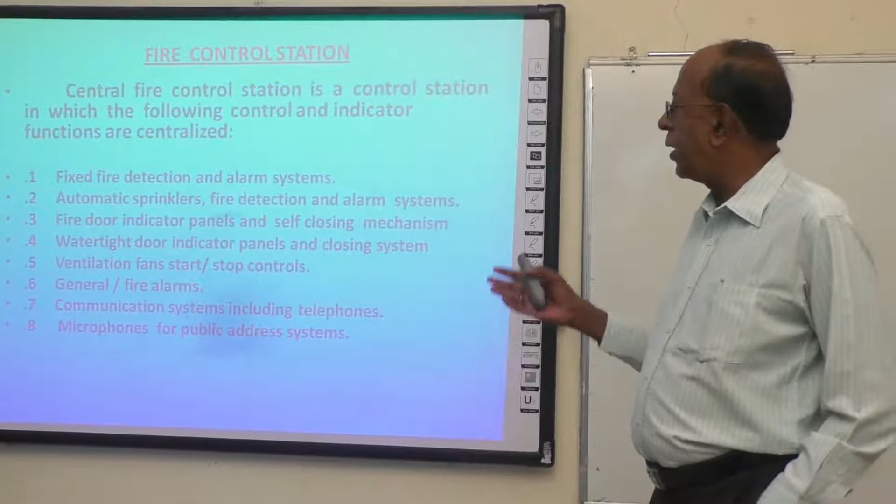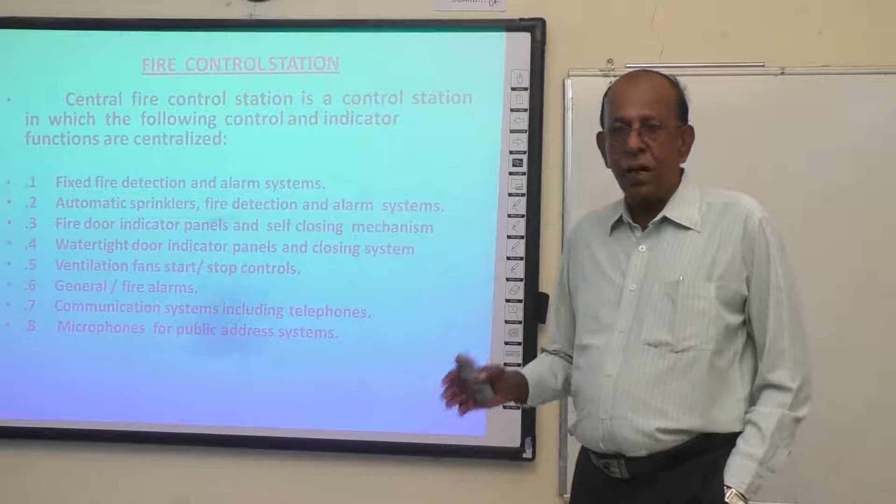Fixed fire detection means it has input sensors from various parts of the ship, connected to the particular alarm panel where fire detection is. When there is a fire in any part of the ship, the detection will be shown in the alarm system in the fire station. Normally it is called the emergency control station. It is part of the accommodation. It can be reached from the control room and easily from inside the accommodation.

So the fixed fire detection alarm system is a part of the main system. Next, automatic sprinklers and fire detection alarm system. Suppose you have a passenger ship, you have an automatic fire sprinkler system. In case of fire, sprinkler bulbs burst and pressurized water comes out to extinguish the fire, particularly in the accommodation. So automatic sprinkler system operation is also part of the emergency control station, the fire control station.

Third one is fire door indicator panels and self-closing mechanisms. Fire control indicator panels show which zone is under fire, where the fire originated, so you can locate it, go to that place and try to fight the fire with a portable extinguisher. If required, additional forces and additional firefighting appliances can be brought to the location. Certain places need a self-closing mechanism to stop the air.

That means skylights, doors or ventilation. The self-closing mechanisms are operated either pneumatically or hydraulically. Those are the self-closing mechanisms. The fourth one is the watertight door indicator panel and closing system.

Between one compartment and another, you have a watertight door. For example, for the engine room or steering gear room, you have a watertight door indicator panel which can be operated from the same fire control station or any other place outside the accommodation. So the watertight door is not necessarily part of the control station, but normally it is within the accommodation. A separate panel is there.

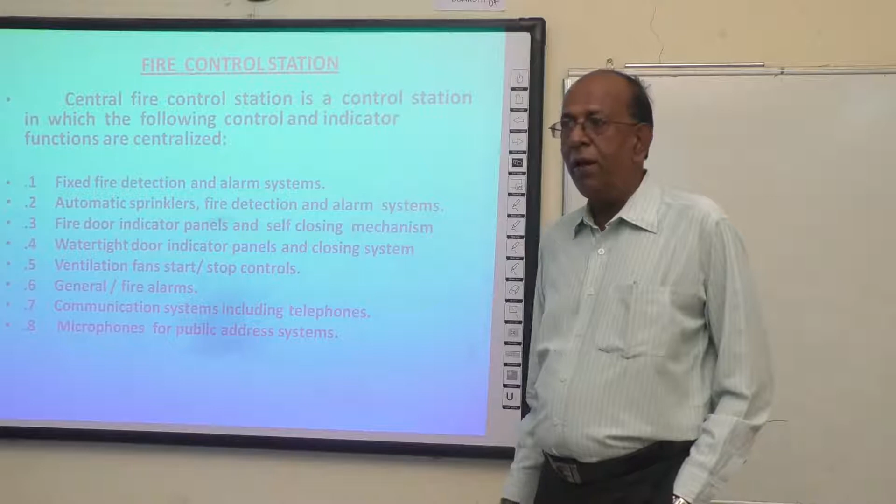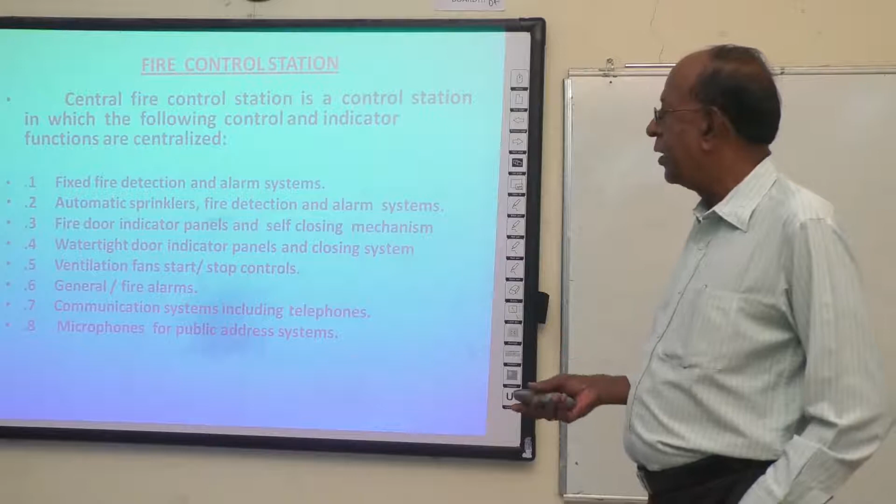Ventilation fan stop controls. Normally in any kind of fire, ventilation fans have to stop. Mostly if you have a CO2 flooding system, the moment you open the panel, all the ventilation fans will stop automatically. If required, you can always stop them manually and restart them. If you want to ventilate the area again after extinguishing the fire, you can start the ventilation fans manually from the same fire control station.

General fire alarms: in case of emergency, from any part of the ship you can have call alarms to intimate other people. If you notice a fire, the fire alarm can be activated from the accommodation, engine room or any part of the ship. The general fire alarm is meant only for fire. In case of fire, you will activate the alarm. You call them manual call buttons.

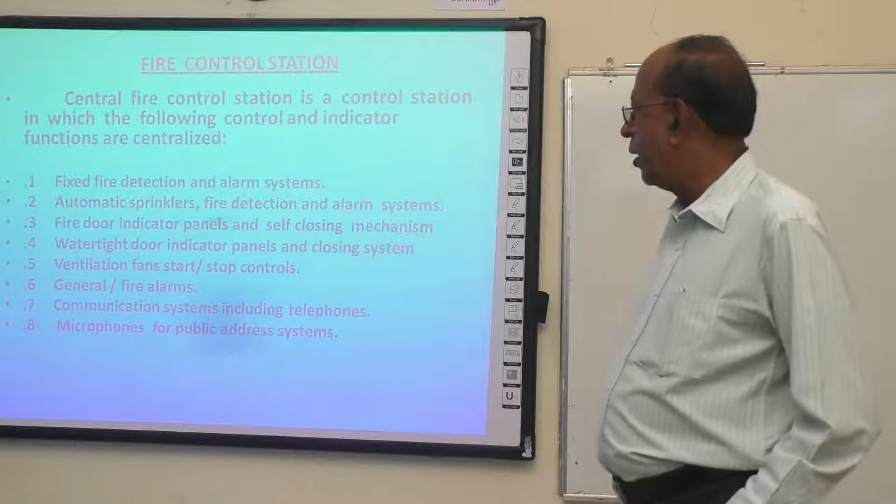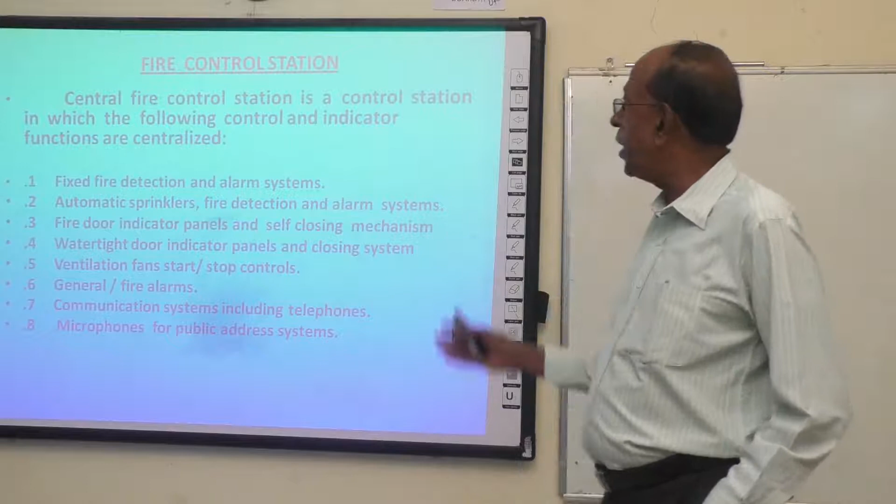Communications including telephones. Through the telephone you can communicate. If required, you can use a talkback system, walkie-talkie or VHF system to communicate within the ship as well as with shore. Microphones for the public address system: if you want to draw everybody's attention at the same time, you can use it. All these things are included in the fire control station.

Even in the dark, what we call blackout condition also. So from this point, they have wiring to the different zones and detector heads are there. We are going to see what kind of detector heads are placed in which section. Some sections need flame detectors, some sections need fire detectors or heat detectors, or sometimes you have a smoke detector. So depending on the zone, what type of heads you are going to use, we will discuss later.

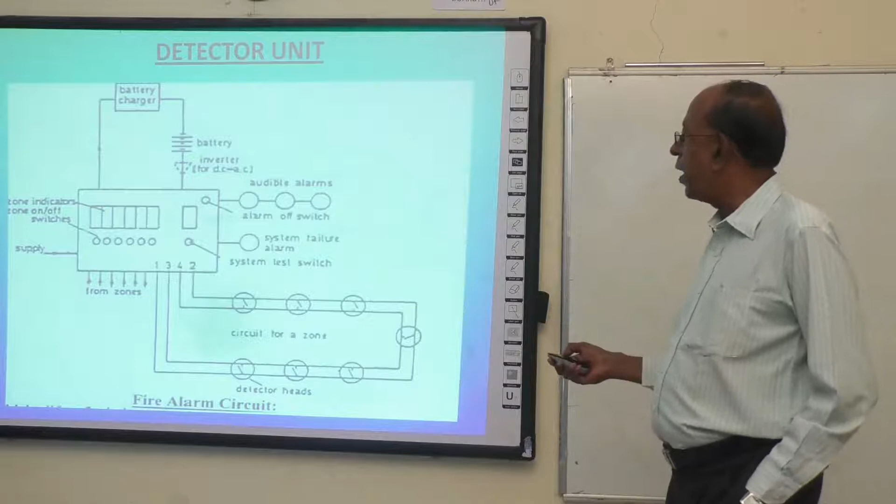In case this panel itself fails, has a breakdown due to the internal electrical circuit, it will give a failure alarm. It is a system failure alarm. So this alarm system is a system failure alarm. This is the zonal connection. Right.

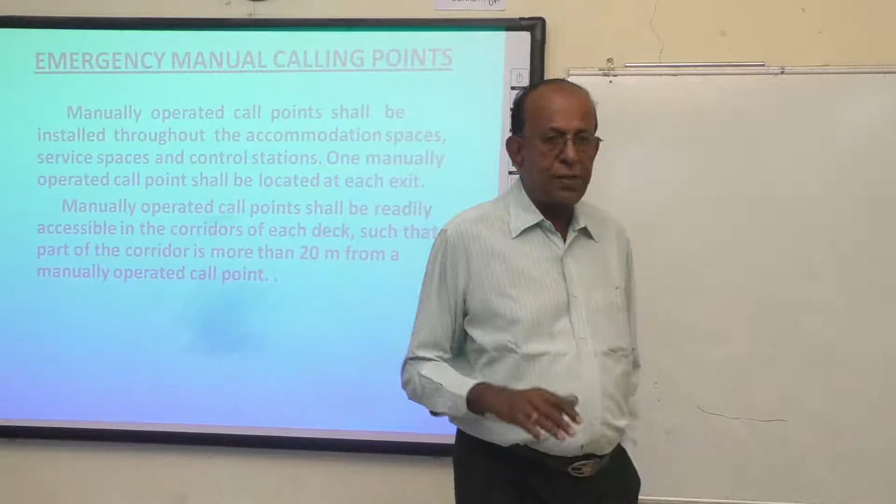So we'll go to this point, what is called manual call points. Throughout the ship, engine room, everywhere passengers are, except the cabins, when you come out of the gate, we have manual call points. The red buttons are available. Some modern ships have a glass fitted; you can remove the glass door or glass flap. Then you can manually operate these call points throughout the accommodation spaces, service spaces, control stations.

One manually operated call point should be located at each exit. Every place where there is an exit, just before that, we must have a manual call point. Manually operated call points are readily accessible in the corridors of each deck, so that no part of the corridor is more than 20 meters from a manually operated call point.

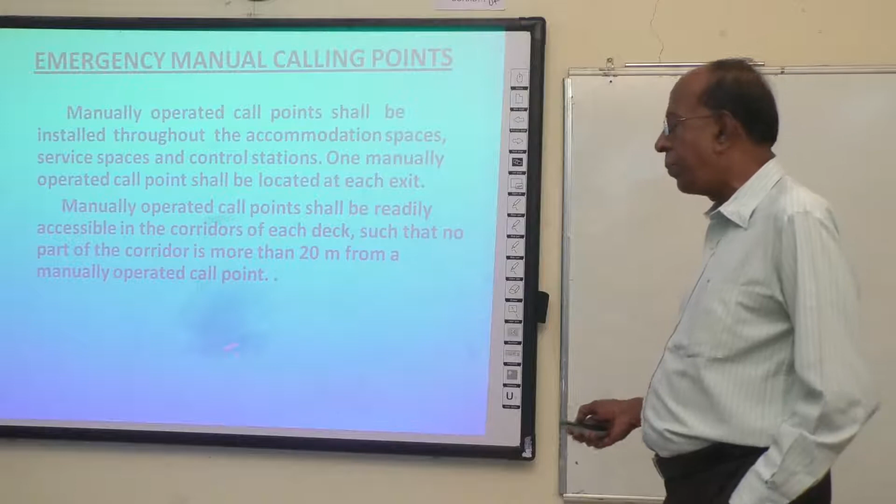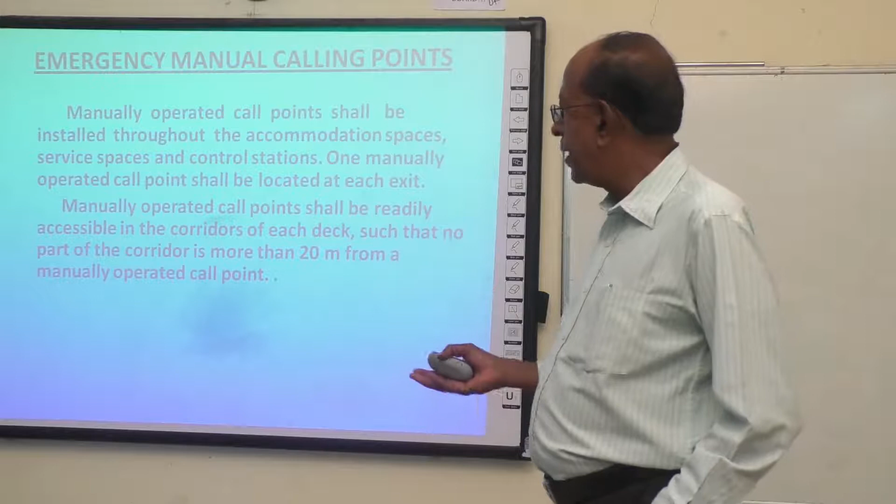This is an especially important point for public passenger vessels. The passengers who come out must be aware of the manual call point. If a passenger notices a fire, naturally they can use this call point. Not only the passengers, but crew or any staff working on the ship can use this manually operated call point.

Detector wiring. Now, wiring of this detector panel is very important because in case of fire, the wiring should not get damaged by the intensity of fire. Electrical wiring forming part of the system should be arranged to avoid galleys, machinery spaces of category A, and other enclosed spaces of high fire risk, except where it is necessary to provide for fire detection or fire alarm in such spaces or to connect to the appropriate power supply.

Now, you know that power is provided from the main power supply, 230 volts or whatever the ship's power supply is. In case the main power supply fails, the emergency generator is always there. It comes on automatically and power is available immediately. Even if in that case power is not available, the inverter battery supply is always there.

So this wiring should avoid the hot spaces. That's what I say: you should avoid machinery spaces of category A. Category A means class A machinery spaces. So avoid the galley, where you are supposed to have flame or a hot furnace or those kinds of things.

Machine spaces, hot chambers near any place which is hot, like a boiler or incinerator, those kinds of areas adjacent to any kind of hot area which can affect the electrical wiring. That's more important. So that's why they are talking about the wiring, not the control panel alone, which is in the accommodation. The sensor is located somewhere, and from the sensor, wiring goes to the control panel.

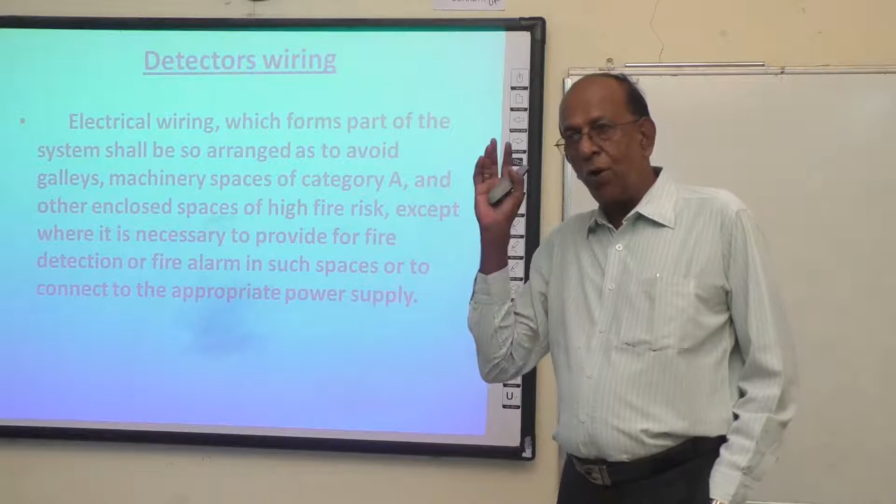From the remote part of the ship, wiring has to pass through so many places, and they have to avoid the galley and machine spaces. That means normally well-insulated conduit pipes are provided for carrying this wiring from the sensors to the control panel.

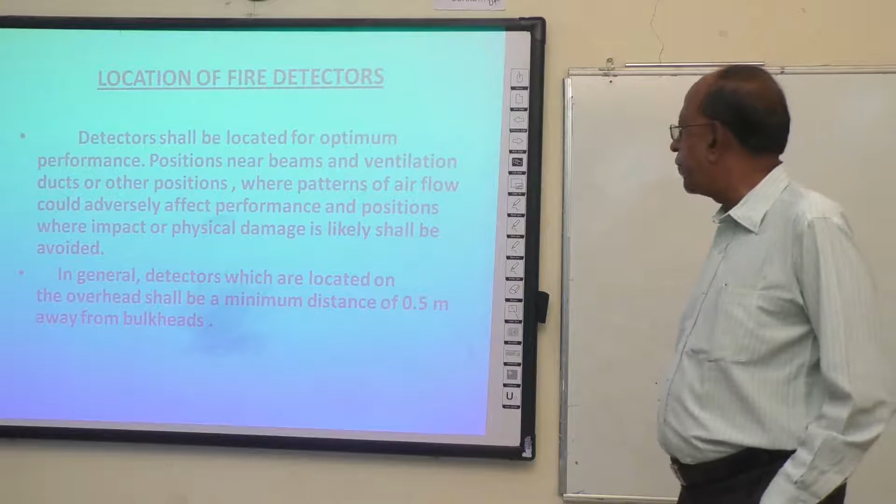Location of fire detectors. Detectors are positioned for optimal performance. Positions near beams and ventilation are other positioning considerations that can affect operational performance. Now we have a fire sensor or a smoke sensor. It is going to sense the heat or flame. There should not be an obstruction.

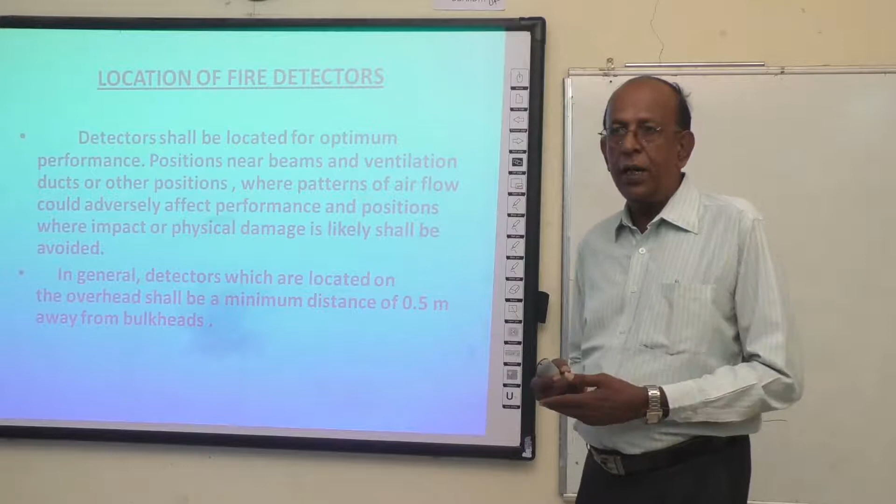If we have a beam or some kind of ventilation fan and the fan is blowing the smoke away, the sensor is not going to work and show the indication of fire. So that kind of ventilation, ducting or positioning will hurt the performance. It should not affect the performance of these smoke sensors or fire sensors.

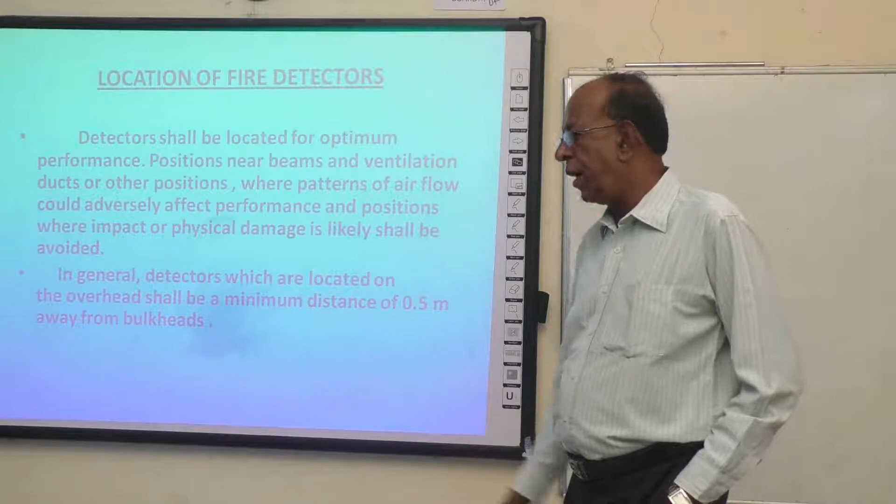In general, detectors are located overhead at a minimum distance of 0.5 meters away from the bulkheads. From the bulkhead, it should be 0.5 meters away; they should not be close to the bulkheads. So this is the maximum spacing of detectors. These are the typical spacings given for the maximum floor area for heat detectors and smoke detectors.

There are two types shown. 37 square meters floor area. How much distance apart do they have to be? 9 meters apart for heat detectors; for smoke, 11 meters. Maximum distance away from the bulkhead is 4.5 meters. These are classification-specific rules.

And the classes will be implemented with the administration, the various flag state administrations. They implement this, and even the shipbuilders make sure that this rule is followed. The administration may require or permit other spacing based on test data which demonstrates the characteristics of the detectors.

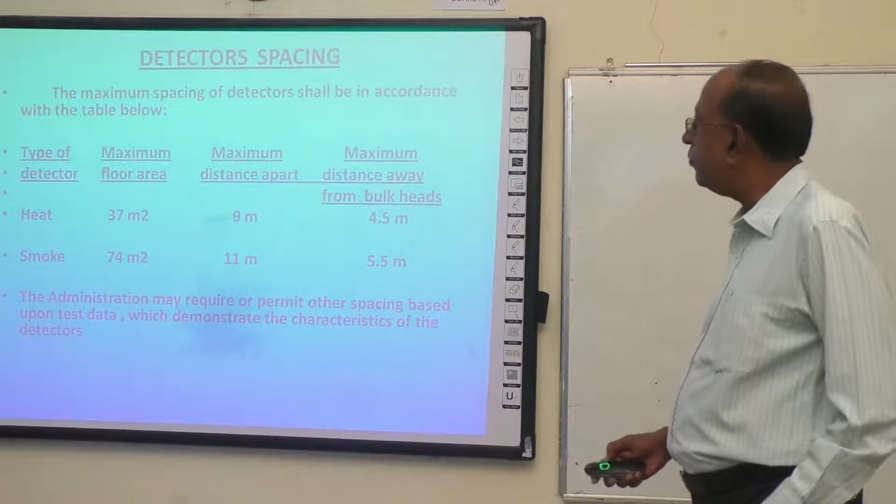There are three types of fire detectors. Three major types, though of course there are plenty of types. One is the heat detector, which senses the heat. The second one is a flame detector, which observes the flame right in front of it. Another one is the smoke detector. Maybe the flame or heat is a little far away, but the smoke emanating from the place is detected by the smoke detector. These are the three major types we are going to discuss one by one.

Fire detectors. Generally, they call them three types. The general name is fire detectors, but these are the three types. Fire detectors sense the heat, smoke, flame or some other indication of fire and initiate the alarm. So any one of the types will sense it, and after that, it initiates the alarm.

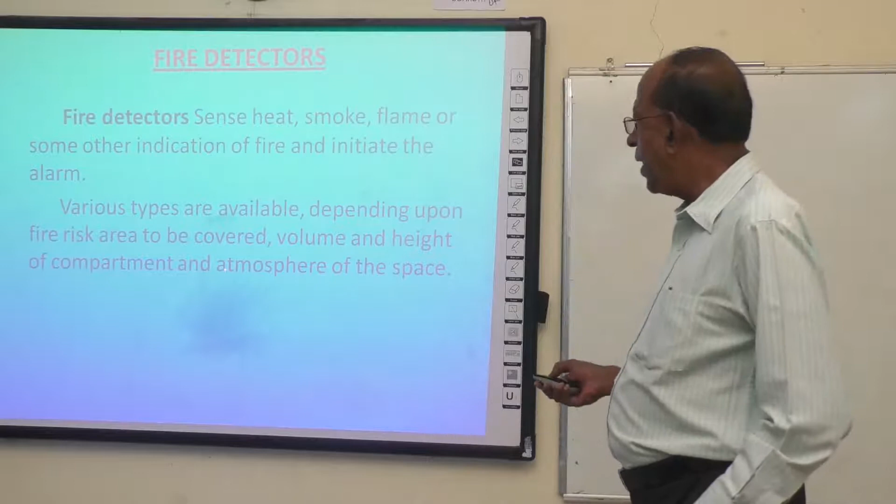Various types are available depending upon the area to be covered, volume and height of the compartment and atmospheric conditions. Maybe the compartment always has a high humid atmosphere, or some kind of temperature, or the area is going to have smoke. So it depends on the area to be covered, volume of the compartment, height of the compartment and atmospheric condition.

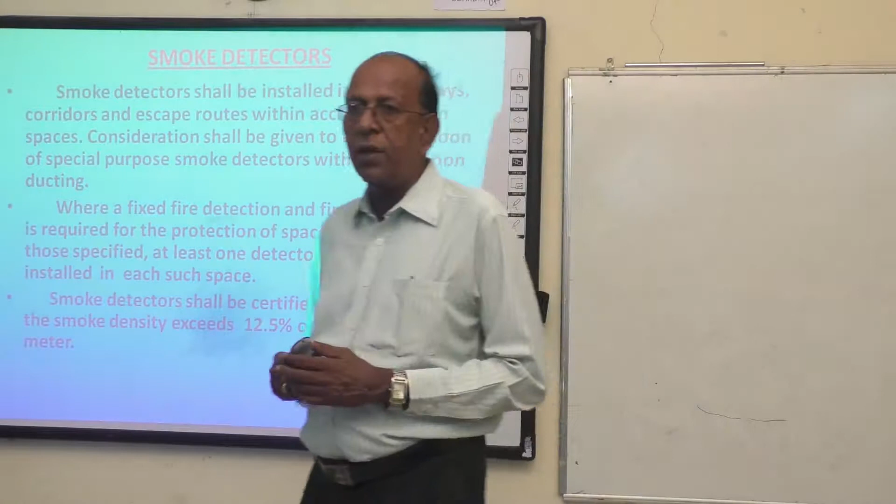Now we will come to the first one, smoke detectors. Smoke detectors shall be installed in all stairways, corridors and escape routes within the accommodation spaces. Smoke detectors are mainly used in the accommodation spaces where the passengers or crew are. Consideration shall be given to the installation of special smoke detectors within the ventilation ducting.

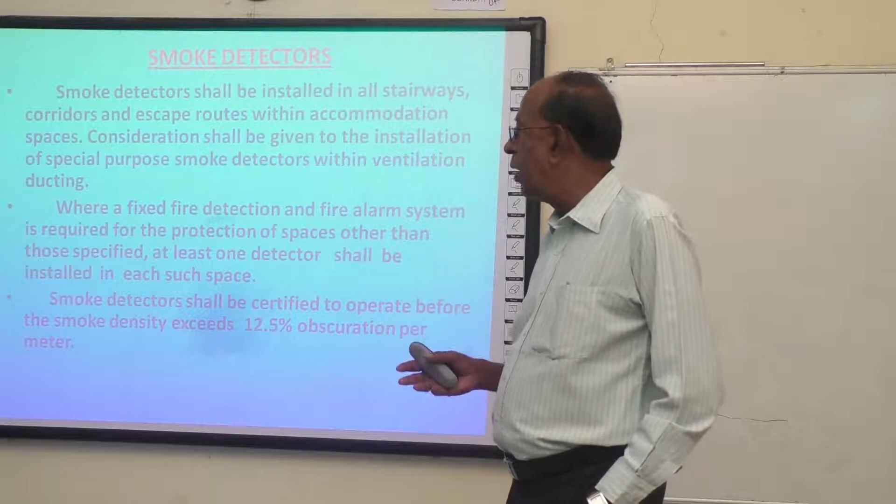In the ducting the air flow is always there, whether it is refrigerated air, cool air or hot air, going for air conditioning or a refrigeration compartment. So in this area special types of smoke detectors are needed for identifying the smoke. Where fixed fire detection and fire alarms are required for spaces other than those specified, at least one detector shall be installed in such a space. So minimum one detector.

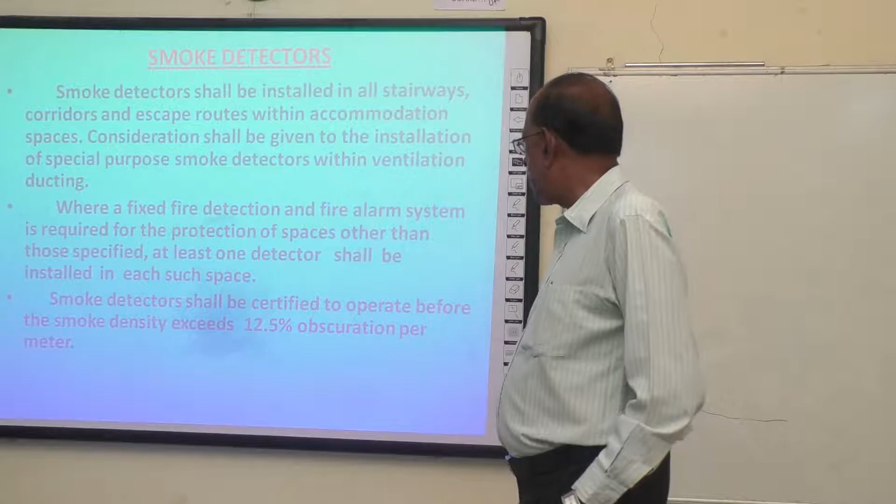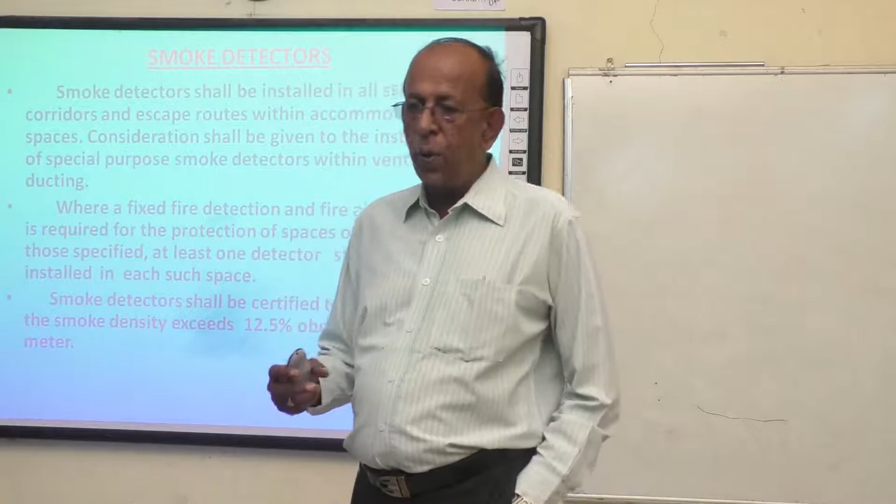Smoke detectors should be installed in this space. Smoke detectors shall be certified to operate before the smoke density exceeds 12.5% obscuration per meter. Obscuration means observing, so it is going to identify. That is called, technically, obscuration. And 12.5% obscuration. Now, what do you say?

What is the oxygen percentage? 21%. Okay, and when it comes down below 8%, it is called an inert condition. Less oxygen. Like that, the smoke density increases by 12%. That means up to 12.5%, nothing will happen. When the smoke density increases to 12.5% obscuration per meter within the distance, the smoke sensors are operational.

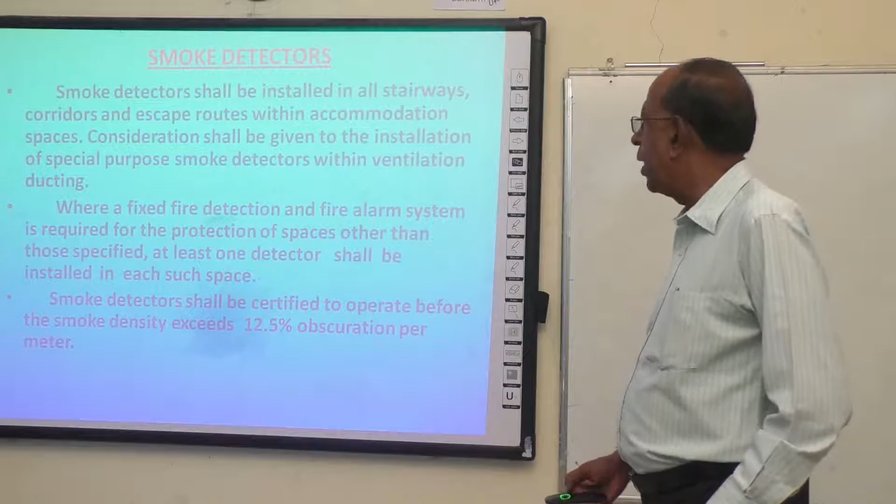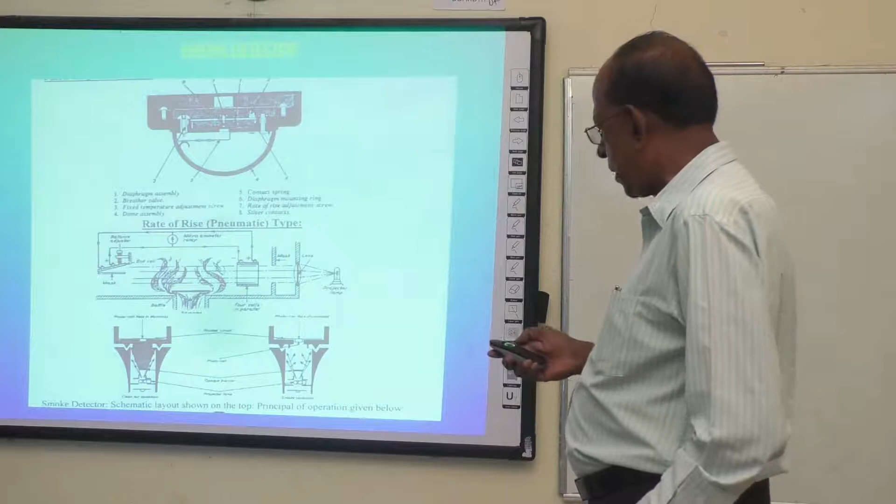This is one type of smoke detector, the pneumatic type, where you have a flame, the smoke is going through that, you have a projector lamp, and you have a lens across here. So, rate of rise type smoke detector. Okay, this is a smoke detector of some knob type thing. It can be replaced. All this assembly can be replaced in case you have a fault.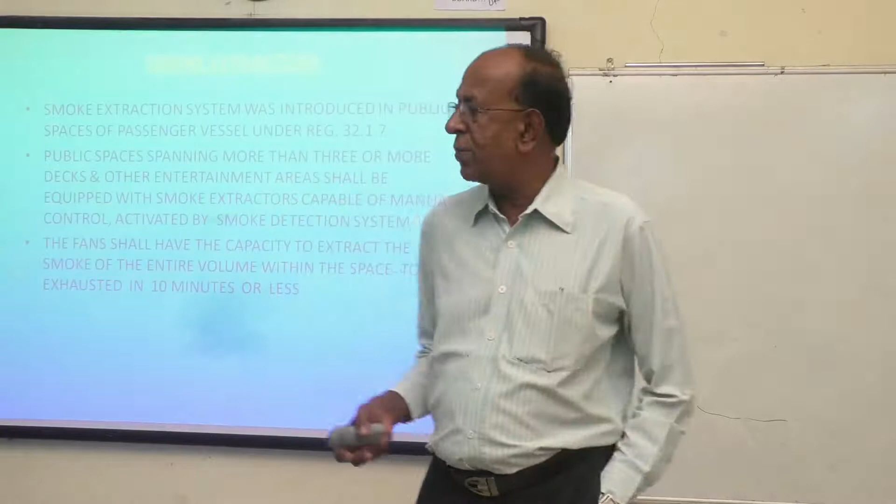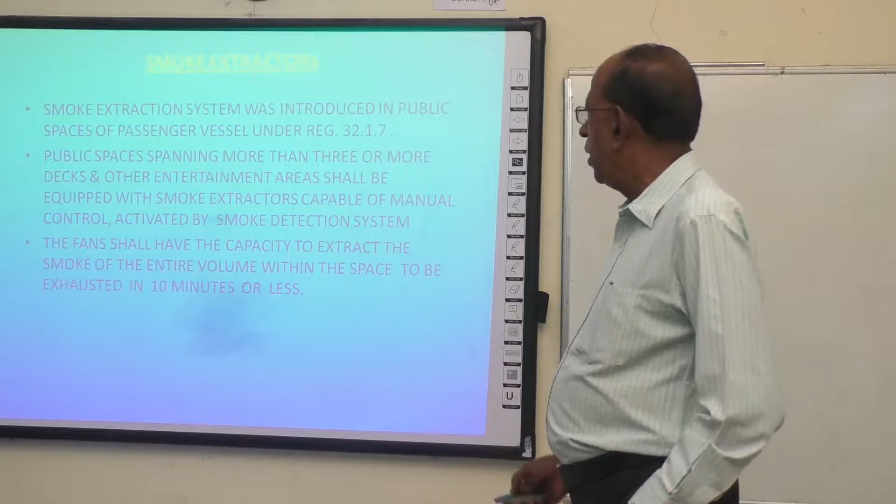Smoke extraction system was initiated in public spaces as well. Now, smoke extraction system. That means public spaces, for example in the passenger accommodation, we have a big hall or dining hall or dancing floor or bar or restaurant or something. In those places there is smoke extraction, because the smoke is being continuously extracted to identify whether the smoke density is increasing or not. So the smoke detector system is capable of manual control.

These fans have the capacity to extract the smoke of the entire volume of the space within 10 minutes or less. The complete volume of air can be extracted. The entire space can be extracted within 10 minutes. This is what smoke extractors are.

Heat detectors: heat sensors and detectors may be fixed temperature or rate of rise. There are two types of heat detectors, called fixed temperature or rate of rise. That means when the temperature reaches 78 degrees or 75 degrees, the alarm comes. Or sometimes for the rate of rise type, there are several types. In some areas, if the temperature is rising from 40 degrees centigrade to 45 degrees centigrade very fast, then the alarm will come.

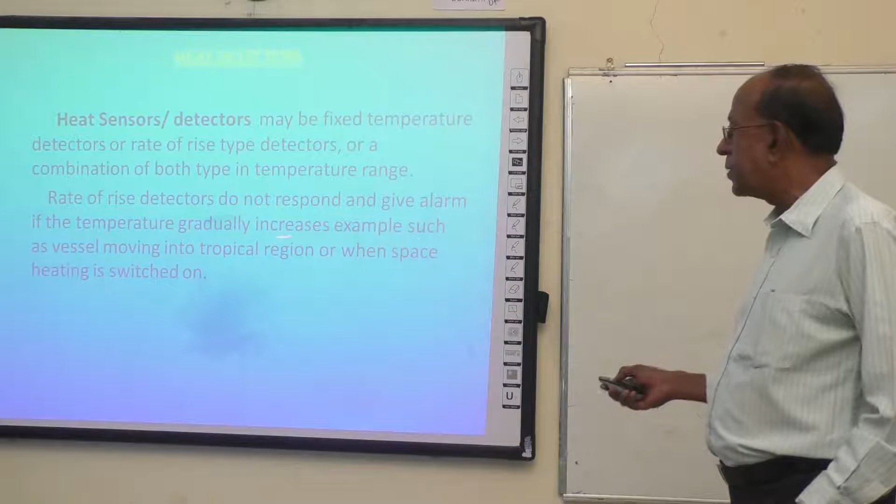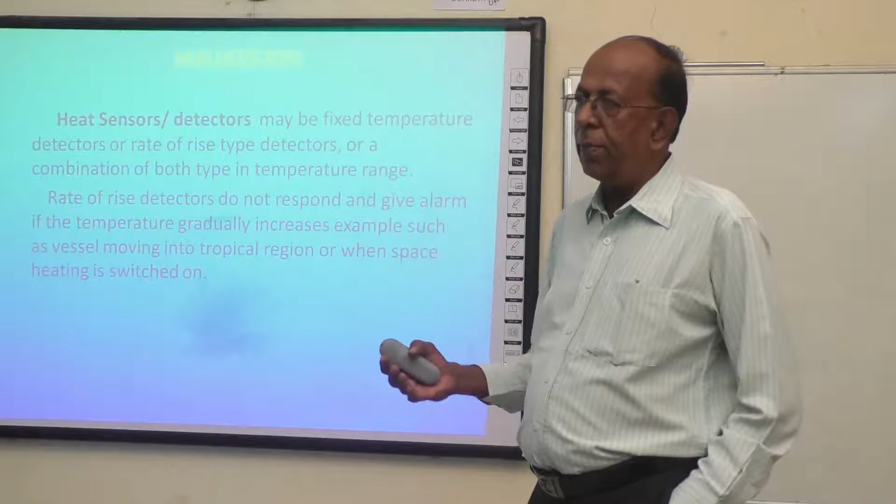But if it is gradually rising 41, 42 over a period of half an hour, that will not work. So there are two types. Rate of rise detectors do not respond to give an alarm when the temperature gradually increases. For example, in this area we are in a tropical region and you are using the room heater. You are increasing the heat slowly from 15 degrees centigrade to 25 degrees. Okay, you want the comfort of the accommodation, but the moment it crosses, the rate of rise is too much.

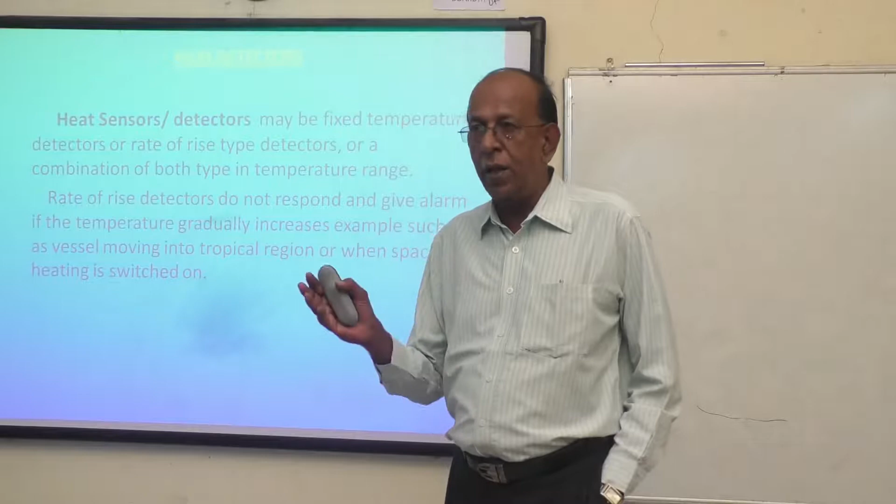When the rate of rise is very fast due to the heat from electrical heaters or steam heaters, then this rate of rise alarm can happen. Otherwise, normally used heat sensors are fixed temperature. For example, you may have a laundry room. A laundry room is supposed to have a temperature of 70 to 75 degrees centigrade for drying the clothes. But the moment the drying room temperature goes to 80 or 85, that fixed temperature heat sensor is going to go. So it depends on the area where you are going to fit the heat sensors.

Heat detectors shall be certified to operate before the temperature exceeds 78 degrees centigrade, but not until the temperature exceeds 54 degrees centigrade, when the temperature reaches those limits at a rate less than 1 degree centigrade per minute. That means per minute it can increase up to 1 degree centigrade: 40, 41, this minute 42, then this minute 43. Up to that, okay. If it crosses that limit, then the alarm comes.

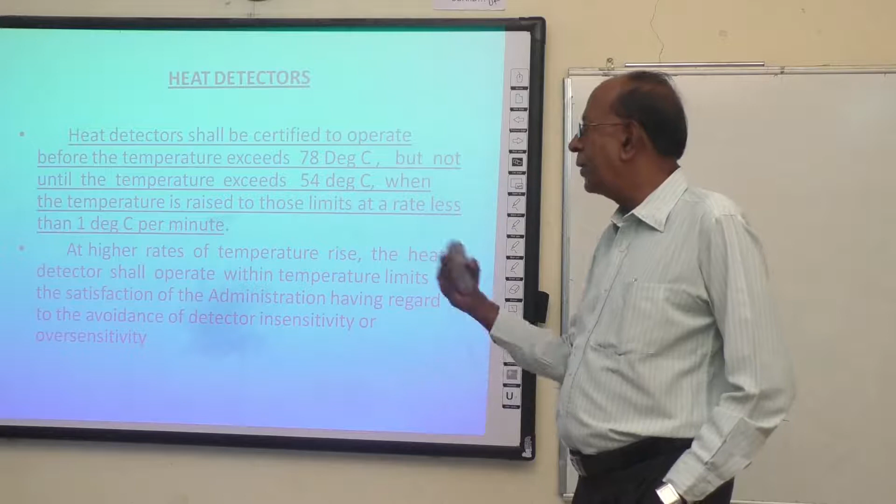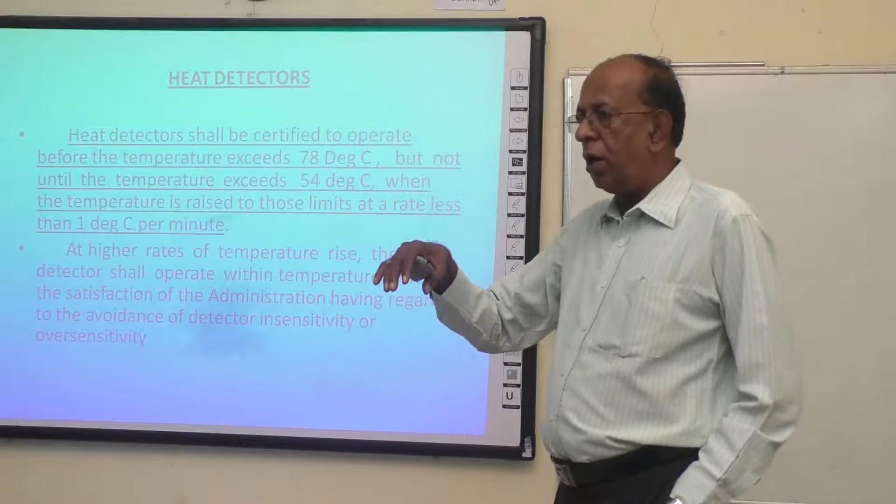At higher rates of temperature rise, the heat detector shall operate within temperature limits to the satisfaction of the Administration. Anyway, the rate of rise type also has a fixed temperature. When it reaches the maximum temperature, for example, 78 degrees, then the alarm is going to come. That's called a heat detector. It senses only the heat. When the temperature inside the hall or the particular compartment increases, the heat detector is going to work.

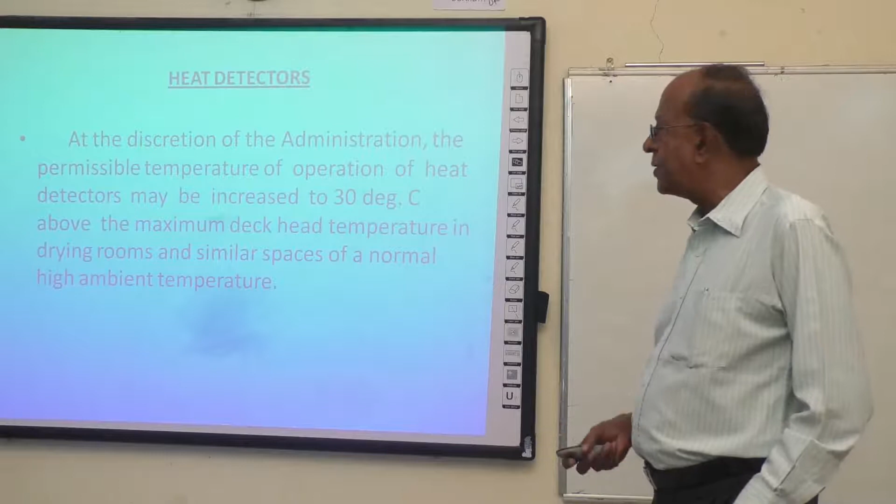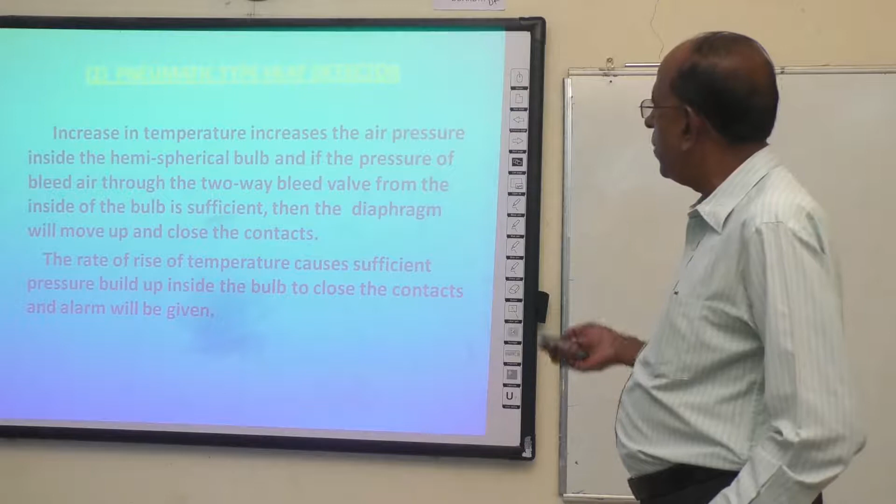So there are types of detectors going through that. Bimetal coil type detector, what is that? The second one is called the pneumatic type of heat detector. Now here, the bimetal type has two metallic strips, A and B. Due to the heat, this one will move faster because it is exposed to the heat, whereas this one will move slower. This is insulated.

That's why insulated means it will move slower. This is not insulated inside. We've got a bimetallic strip. Bimetallic means two metals; each metal's linear expansion is different, and thermal conductivity is different. So the lighter metal will expand faster and move the contact. The movement makes a contact and it gives a signal.

So this sensor, which is fitted in the engine room or some place where it is sensing the heat, closes the circuit and gives the alarm to the fire control station for the particular zone. Within the zone there are also different sectors, so you can identify which part easily. This is the bimetal type.

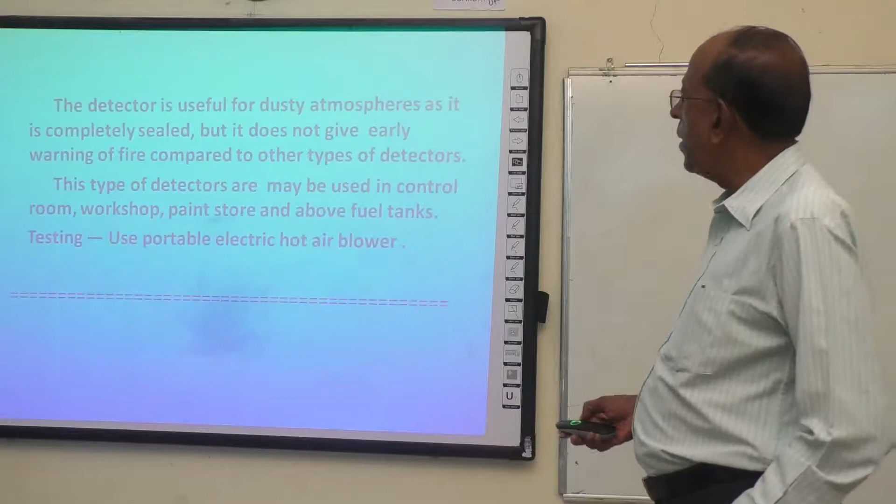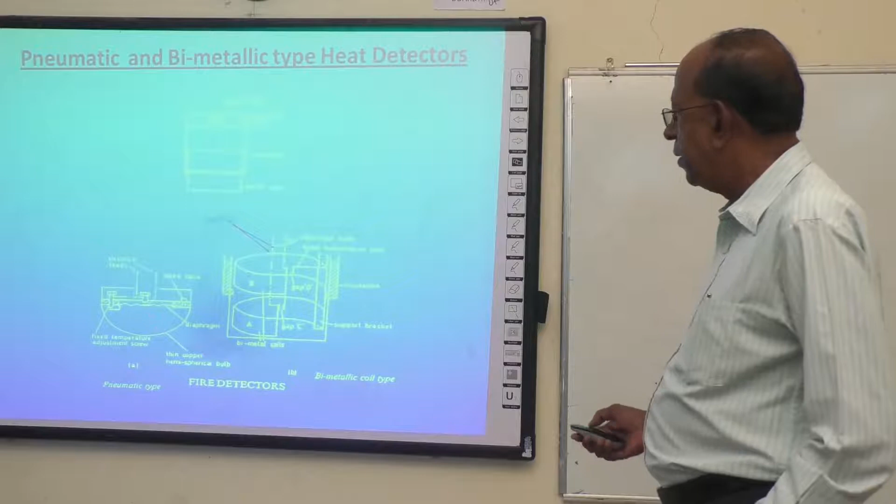Okay, the next one is the pneumatic type heat detector. This one has got a diaphragm inside. The heat comes, the air inside expands. They have a fixed temperature adjustment screw, which means you can adjust the temperature. In some places you want the alarm at a higher temperature, where you normally get false alarms. Then you can use that.

So this type has a bleed valve and a diaphragm. The diaphragm starts moving and it makes a contact. This is shown like this, but actually they have insulation around it, so you can't see from outside. What is inside is actually the air in these pipes.

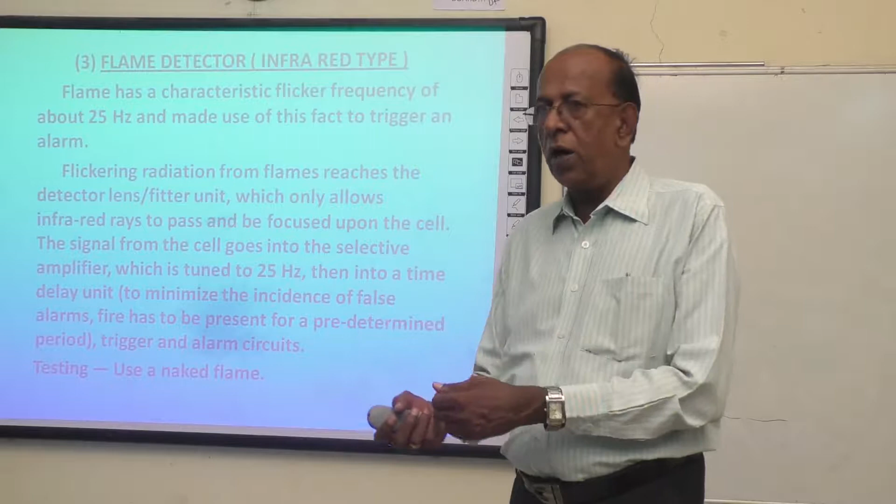Then the flame detector, infrared detector. Now you see the flame: someone is lighting a match, or some gas cutting. If this kind of sensor is fitted there and something like a burning torch or anything is lit, immediately the alarm will come, because it has a flicker frequency of 25 hertz.

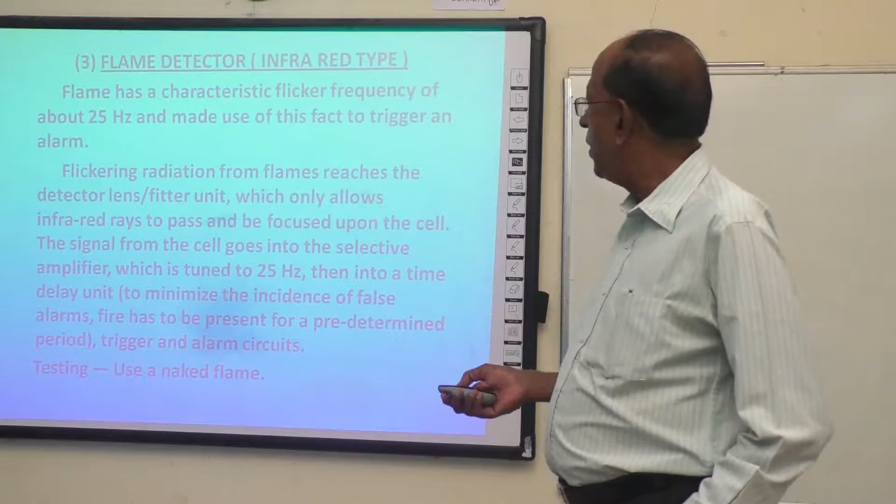25 hertz is a very low frequency. Radiation from the flame reaches the detector lens, which allows the infrared to pass and focuses it upon the cell. The signal from the cell goes to the amplifier tuned to 25 hertz. There is a time delay unit to minimize false alarms; the fire has to be present for some time. Okay, now what is it?

Now we have a neon lamp there. The flame is right in front of you, something is burning, and the flame reaches this area. The photoelectric cell is like what you use in a camera; it is like a camera lens. It catches the flame, then the amplifier, tuned to 25 hertz, and they have a time delay.

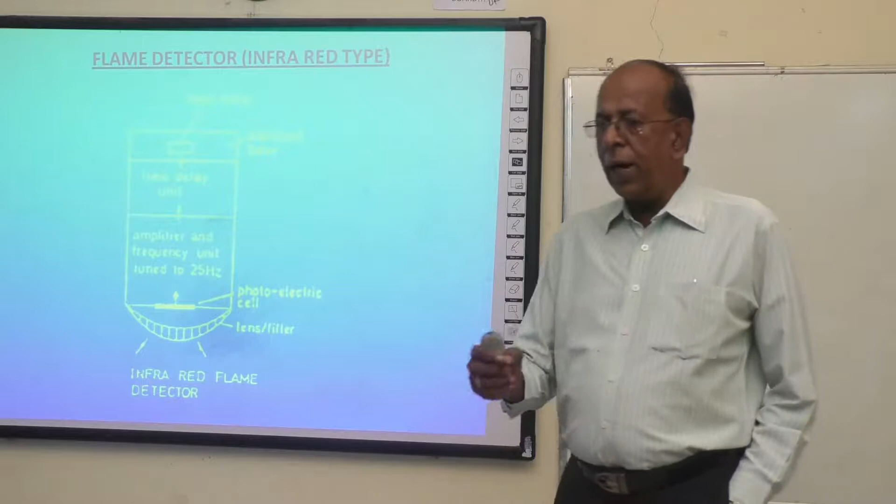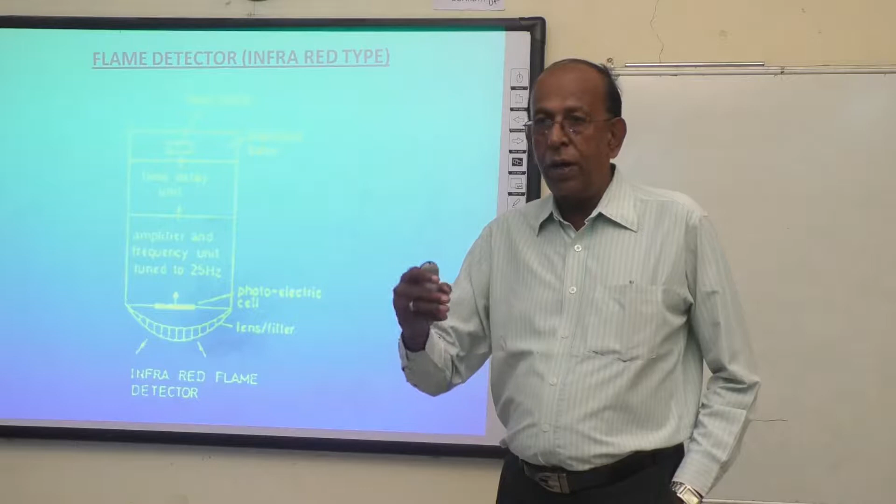Why is the time delay unit there? Momentarily there was a fire, like lighting something with a lighter, and then you put off the lighter. So it does not alarm immediately. That's the time delay unit. Otherwise, you have the neon lamp sensor. This is called the flame type, infrared type. It is used in most places on the ship and is one of the popular flame detectors. This one is a heat detector; this is the flame detector, infrared type.

Then the smoke detector, light scatter type. What is the light scatter type? We have some kind of passage with light passing through. Suppose smoke comes in front of it; the light will get scattered and disturbed. That's called light scattering. On that principle it uses a photocell. I'll show you the picture.

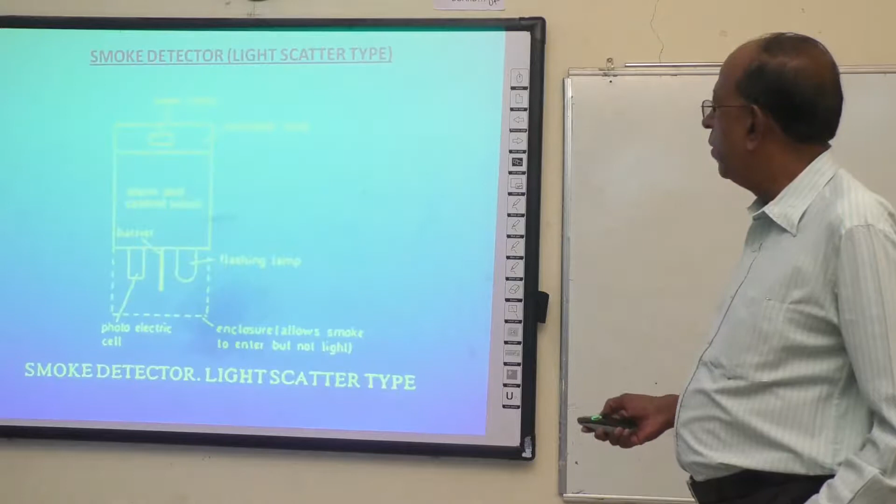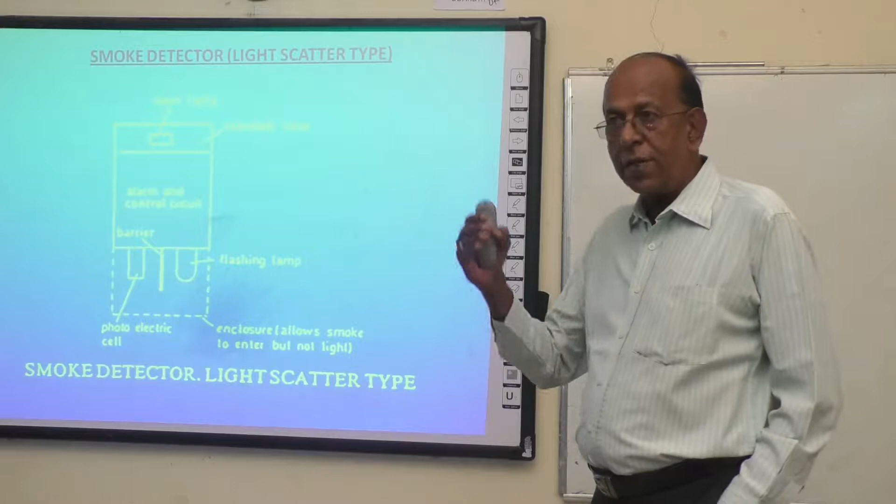Here we have a photoelectric cell. This is the enclosure, the flashing lamp is there, and the light coming through will get scattered. Because of the disturbance of the beaming light, the alarm comes. That's called the light scatter type. So these are the two types: one is the infrared type, the other is the light scatter type.

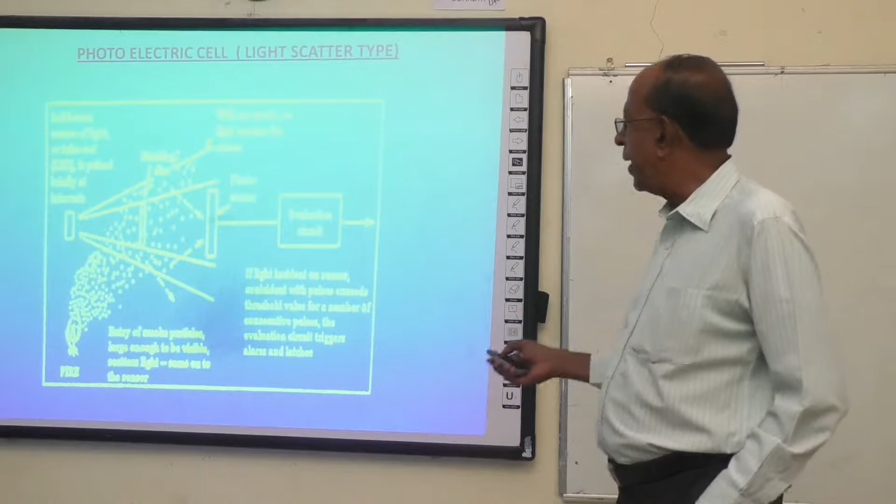This is the smoke detector, the principle of the photoelectric cell. This shows how the beam goes when smoke is coming through; the light gets disturbed. Smoke passing through means the light will not fall properly on the lens. This is an evaluation circuit with the sensor. The light falls on the sensor, and if it is obstructed by the smoke, the circuit gets activated with the smoke alarm.

That is the main principle of that light scattering type detector. In some element, the detector photocell of light scattering makes about 90 degrees to the parallel beam. So there are two types: one is the horizontal type, another one is this type.

Smoke comes in like this, with a parallel light source, and there are two light sources in the machine - a measuring cell and a parallel light cell. The measuring cell is here, smoke comes from here and gets disturbed. The rays, shown as arrows, get distracted by the smoke instead of going past, and this activates the photocell, which gives an alarm. It is connected to the circuit which gives an alarm.

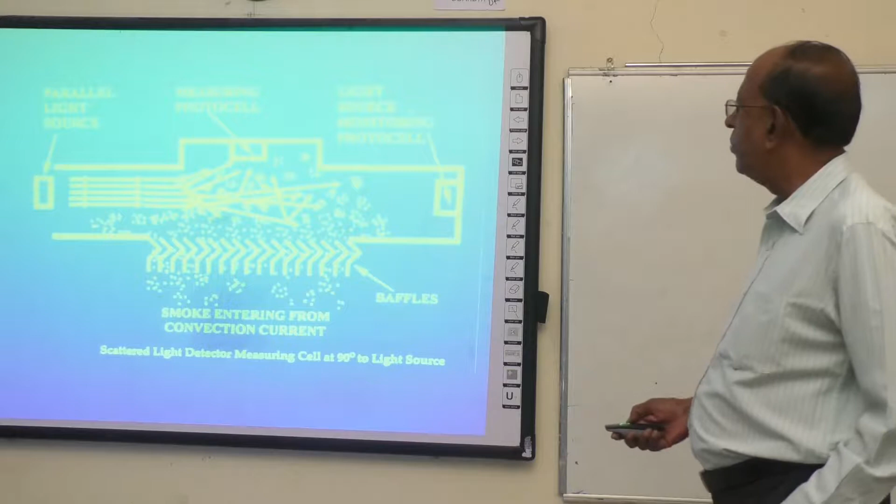Then you got smoke combustion products ion chamber smoke detectors. This is another thing - ionization chambers. There are two ionization chambers in series, where radioactive material provides a continuous supply of ionization.

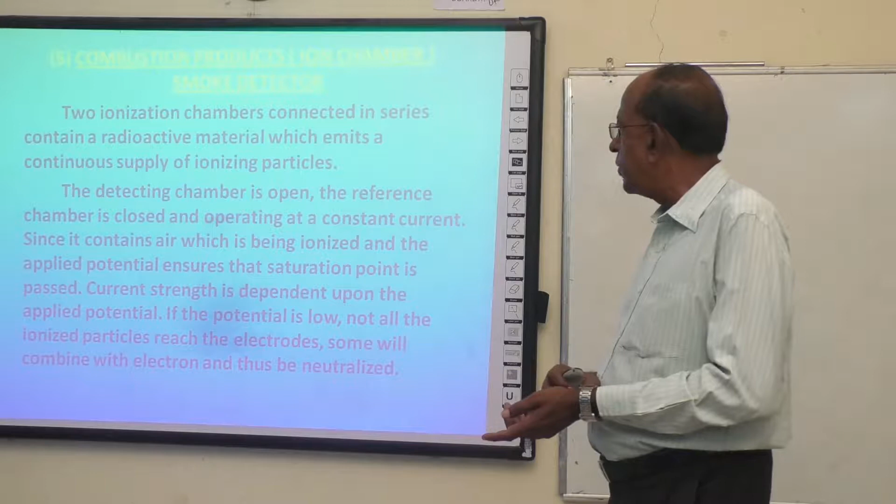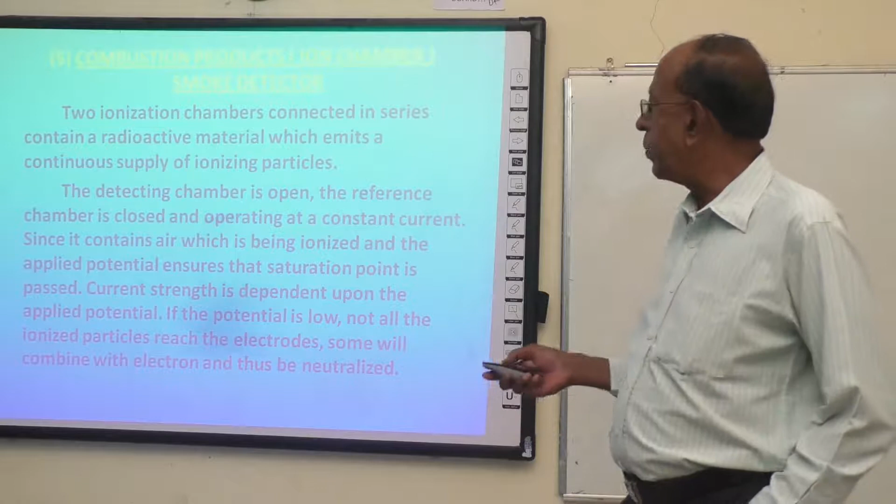So what is happening here? We have a radioactive chamber and a reference chamber. Any combustion gas detector, for example, is fitted where the diesel engine exhaust manifold is located, close to that.

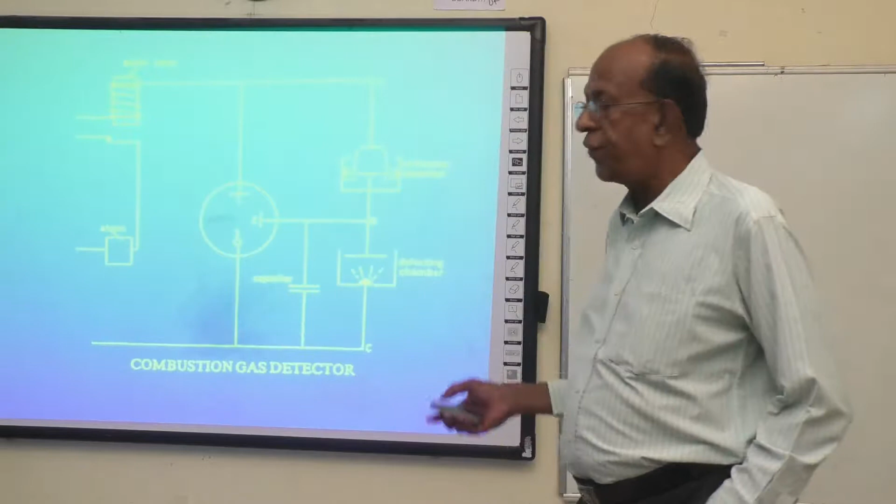In exhaust gas, there is combustion gas - it's thick black smoke. If it comes in contact with any oil or inflammable products, it will catch fire. That's the reason the combustion gas detector is fitted near the boiler, near the diesel engine, very close to it. Any exhaust gas leakage that comes out will be measured by this detecting chamber, which will activate the alarm, give an alarm relay, and trigger the alarm.

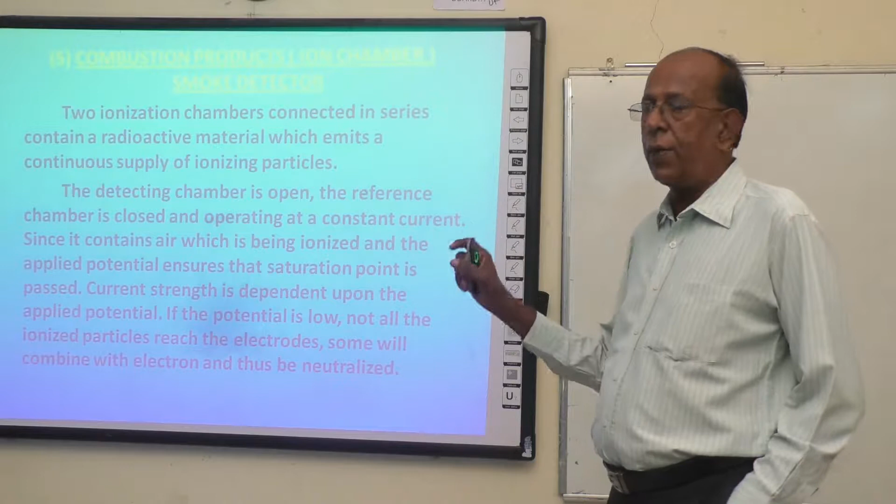So what is happening here? The detecting chamber is open, the reference chamber is closed, operating at a constant current. So the current supply is always there for the circuit. Since it contains air which is being ionized, generally air is around, air is only there.

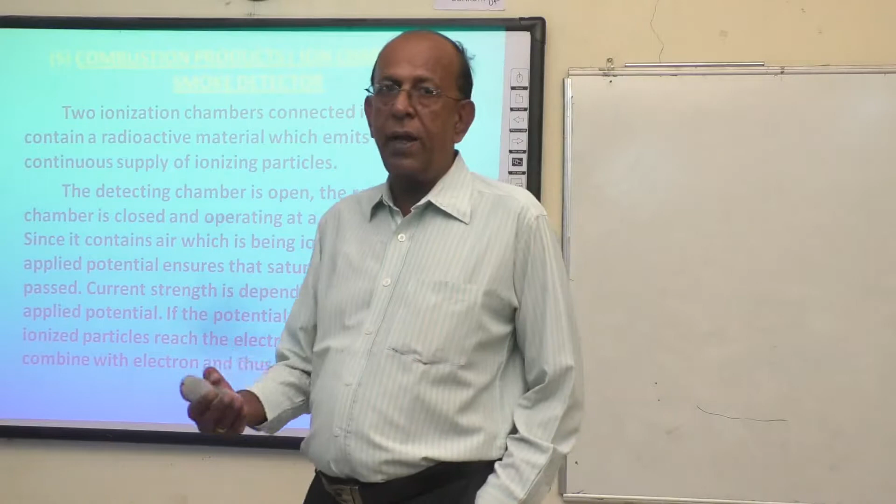The moment smoke comes in, the current strength depends on the applied potential. If the potential is low, not all ionized particles reach the electrodes - some will combine with the electron. So the moment you get disturbance of the air, the ions in the air get disturbed, then you will get an alarm.

With the potential disturbed beyond a certain value, all the ion components and electrons cause the current to remain approximately constant irrespective of further increase in potential. So the potential difference is measured between the terminals, and when ionization takes place, the potential difference remains constant as long as it's just air.

The moment there is saturation of smoke inside the ionization chamber, the reference chamber has a constant resistance. Combustion particles, visible or non-visible, pass through the open detecting chamber, and the current will drop. This combustion product is made of larger, heavier particles than normal gas.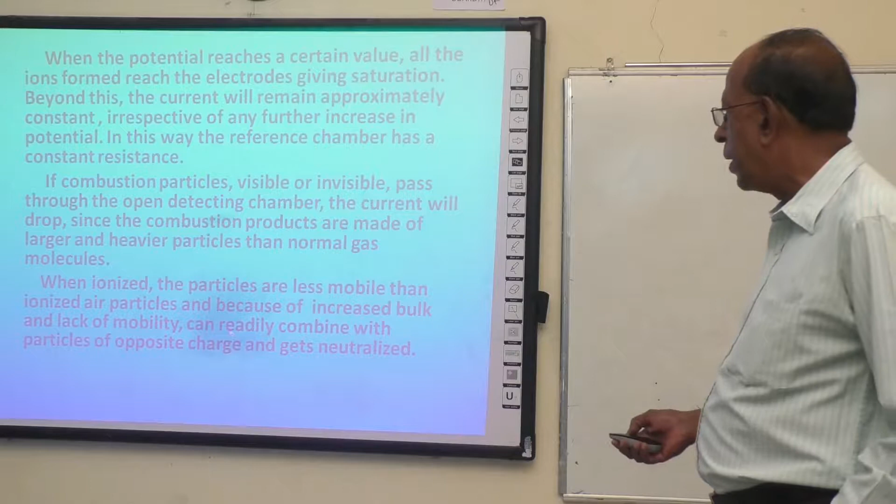Normally the gas molecules or combustion gases have carbon products or carbonaceous products, hydrocarbons, carbon dioxide, carbon monoxide - those kinds of heavier particles. When they come across this detecting chamber, the ionized particles are less mobile than normal ionized particles because of the increased bulk and lack of mobility - they readily combine with particles of opposite charge and get neutralized.

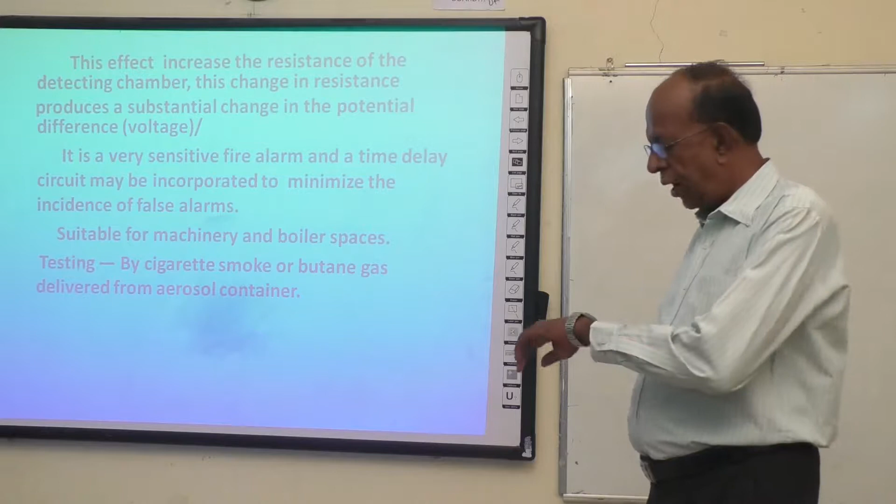This effect increases the resistance of the detecting chamber, and this change in resistance produces a substantial change in potential difference. So the potential difference being measured changes because of the change in atmosphere, the presence of combustion gases. It is a very sensitive fire alarm, with a time delay unit between incidents to avoid false alarms.

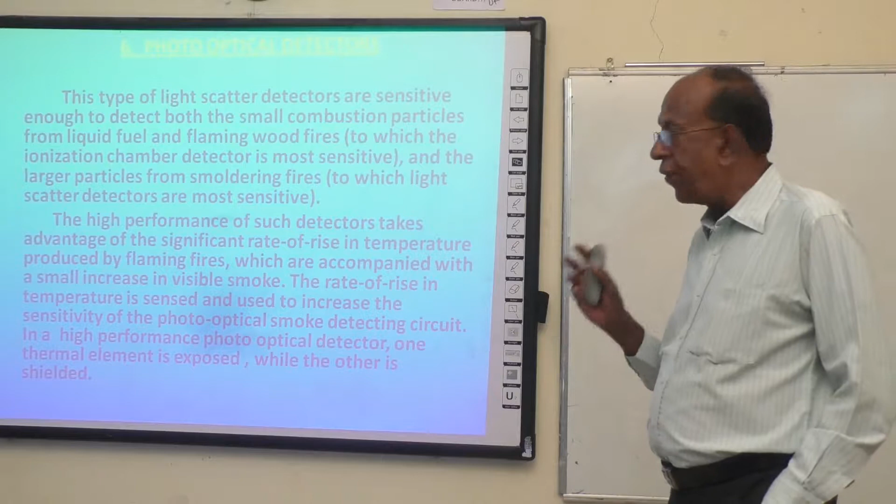Photo optical detectors, or light scatter detectors, are sensitive to both small combustion product, liquid fuel and flame gas, and to larger particles from smoldering fire. So these photo optical detectors can detect both types of fires: one is flame with smoke, the other is smoldering fire where there is no flame at all, just smoke continuously coming. So you can have both things.

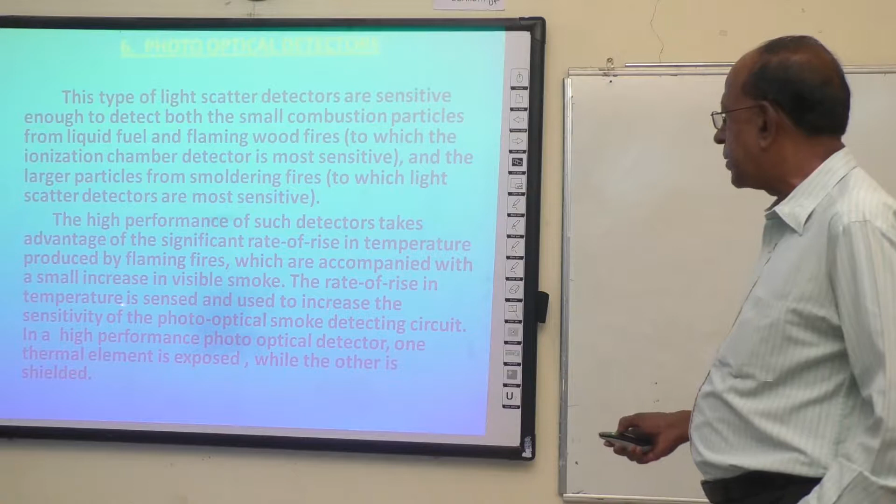Photo optical detectors are very sensitive. High performance detectors take advantage of significant rate of rise in temperature with flaming fires. When accompanied with a small increase in visible smoke, the rate of rise temperature sensitivity can increase the sensitivity of the photo optical smoke detector. High performance photo optical detectors have one thermal sensor and one shielded sensor.

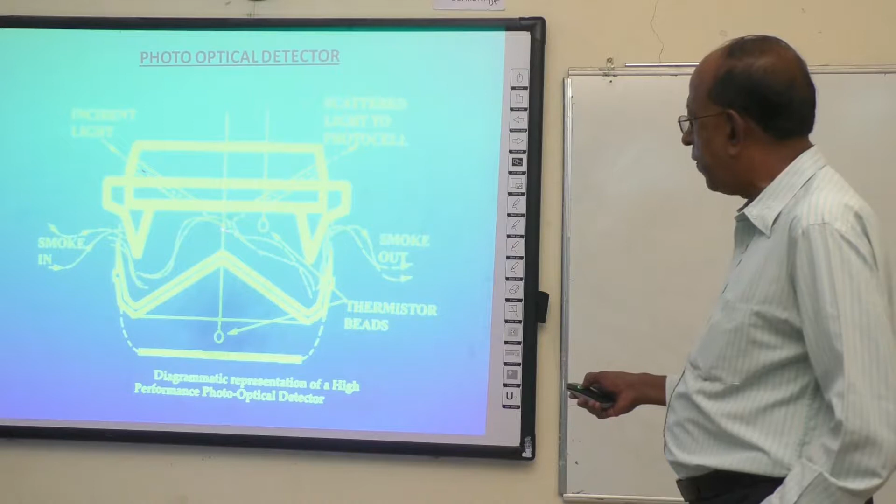The scattered light comes from here, you have a reflector. Basically inside you have a reflector, light will go through and reflect to the photocell, which will sense the fire or smoke very easily. This kind of photo optical detector is very compact and very easy to use.

This is very powerful for any kind of fire, with or without flames. In case of gradual ambient temperature rise with no appreciable difference between the thermistor devices, the optical detector will detect smoke from smoldering fires at normal sensitivity. When rapid rise in temperature occurs, the exposed temperature rises more quickly than the shielded thermistor - this senses the difference in temperature and increases the sensitivity of the light scatter optical detector.

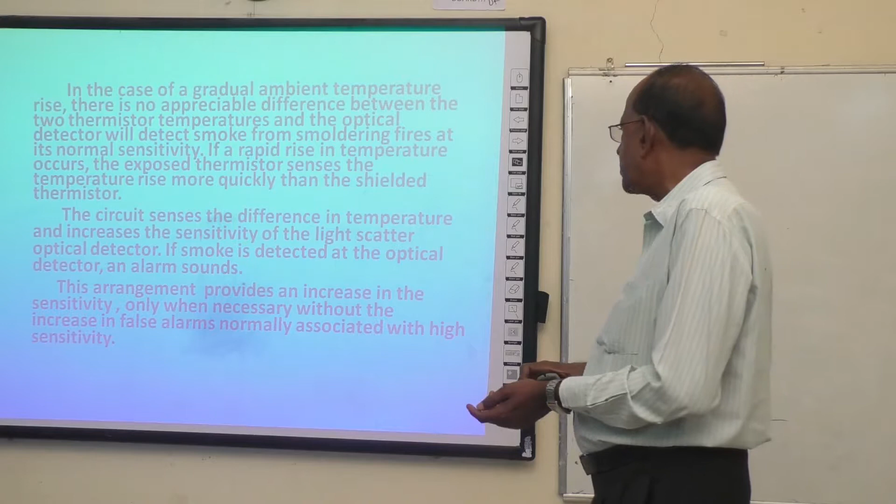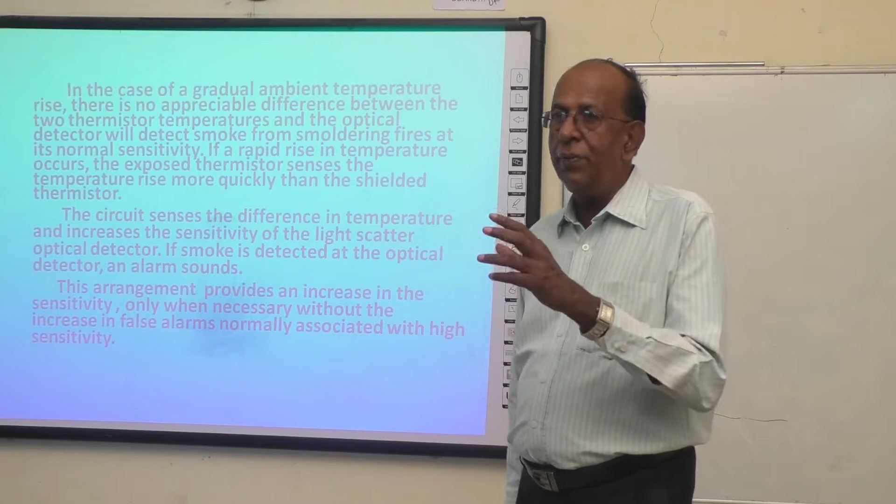Sensitivity means it senses fast. If the sensitivity is very high, it means this detector will give false alarms. That's why sensitivity adjustment has to be there. So normally it's adjusted by the light beam, whatever type of light you provide there which can react with the smoke. So the second sensor senses the difference in temperature, and different temperature will activate it.

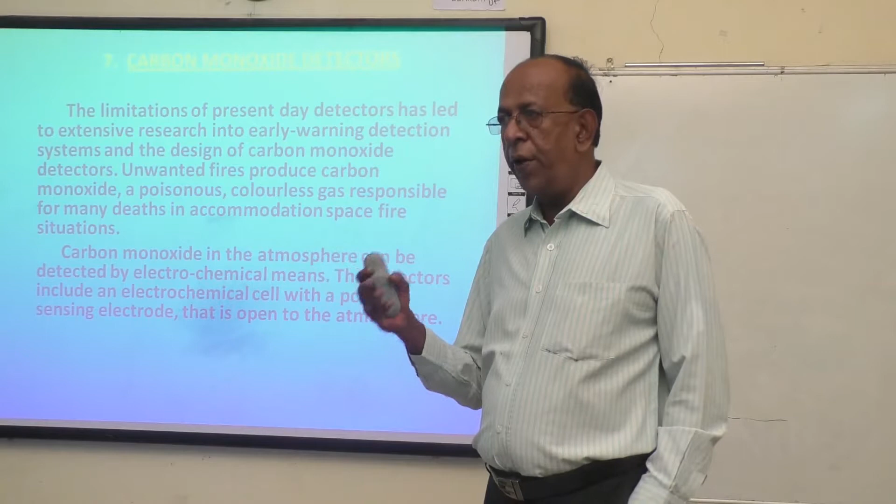Then there is the carbon monoxide detector. Generally for any kind of fire - now present day there's another new type of carbon monoxide detector, which is not used on board, but for knowledge purposes I am saying it's used generally in hotels, restaurants or big malls, where you have shortage of oxygen and presence of carbon monoxide. Of course it can also be used in passenger ships where you have a big area, with limitation of percentage in early warning reaction of the system.

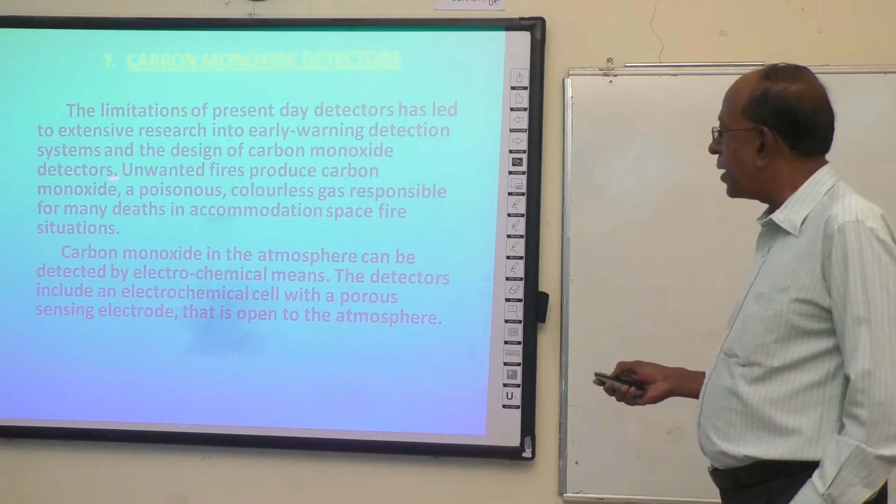They say carbon monoxide gas - unwanted fire produces carbon monoxide, a poisonous, colorless gas, very deadly, in accommodation space fire. So what happens when fire occurs? Oxygen is being used up, and generally due to shortage of oxygen, only carbon monoxide gets released. Because of carbon monoxide, people die from suffocation. So in those kinds of places, carbon monoxide detection will be very effective.

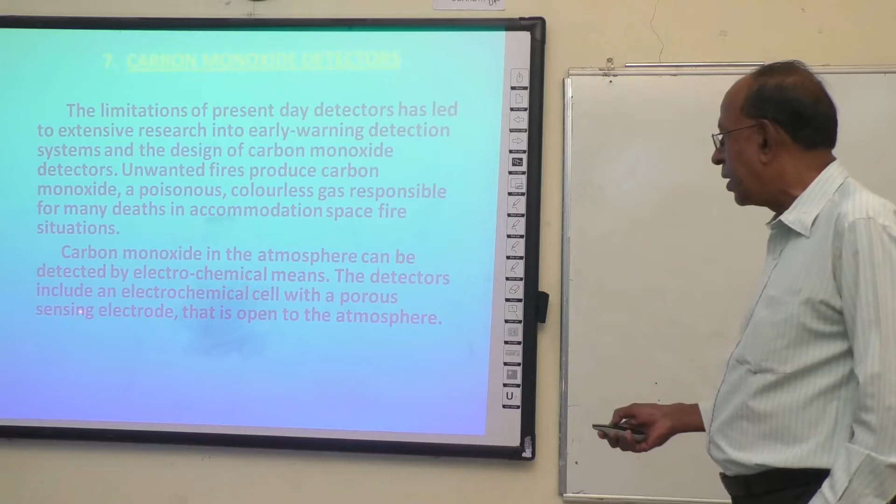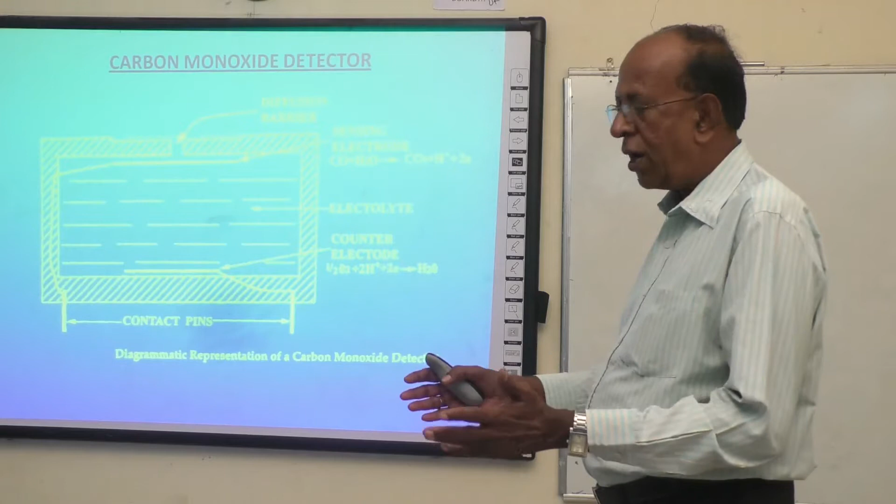Carbon monoxide detection in the atmosphere can be likened to an electrochemical cell with a porous sensing electrode that is open to the atmosphere. So we have an electrical cell, electrode like a lead acid cell, with a diffusion barrier. It looks like a small battery only, similar to what you use for a car. You have electrodes inside, with a chemical electrolyte - acid - and you add distilled water to make the electrolyte a certain specific gravity.

Now, the carbon monoxide sensor senses through the diffusion barrier, because the chemical reaction forms: carbon monoxide plus H2O equals CO2 plus 2H plus plus 2 electrons. This is carbon monoxide and this is water, H2O. So what do you have inside this? It passes through this area with the diffusion barrier, and it gives a difference in voltage - basically the potential difference will be showing.

So this is a part of the detectors I am showing. Okay, this is a type.